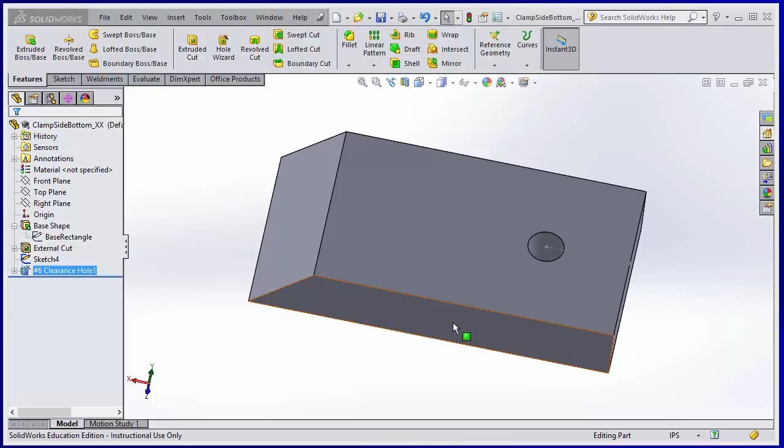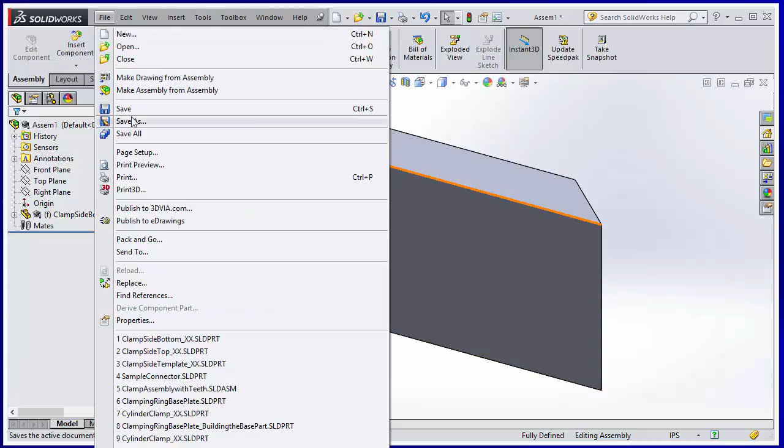From the File menu, go to Make Assembly from Part, and it'll open into the new assembly. There won't be anything on the screen yet until we add all the components. Once we insert the bottom part into our assembly, we can go to Save As, and we'll save this as Clamp Assembly with space for your initials.

Now we'll add the other component, the top side. We'll go to Insert Components. As you saw when you started up, clamp side bottom's already inserted, but we need to insert the top as well. So we'll go to Browse. In your student folder, you should find clamp side top.

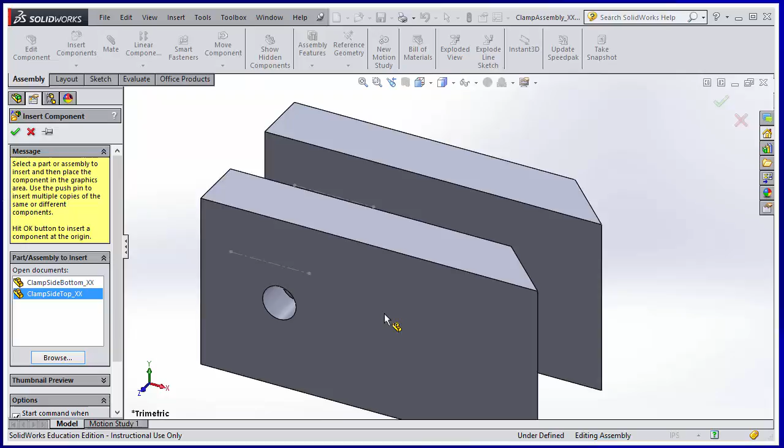Clamp side top will appear, and you will have to set how these two parts mate together because the computer doesn't assume any orientation. We'll go ahead and tell it to set it by single clicking the clamp side top. Now the next thing we want to do is position these two where they're facing each other so that the two larger sides of the clamps face each other.

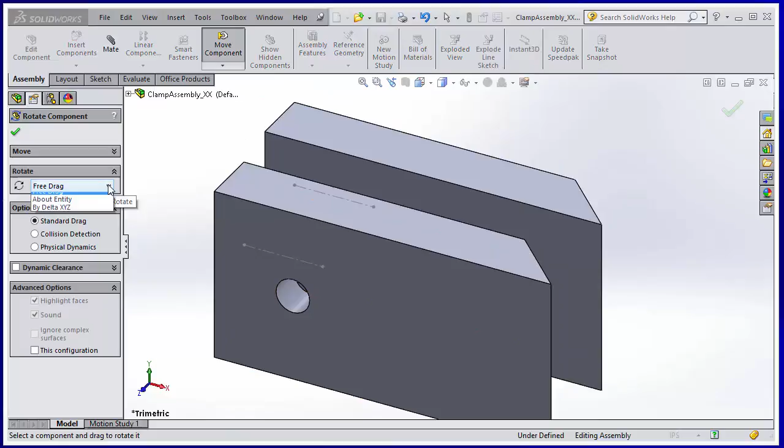So we'll click Move Component, and we'll go to Rotate Component. In the Rotate section, we'll change this rotation setting from free drag to by delta XYZ. This allows us to actually specify degrees we want it to rotate. Basically, we want to flip this over so that the two larger sides are facing each other. So we'll flip this on the x-axis, which we can see here, by 180.

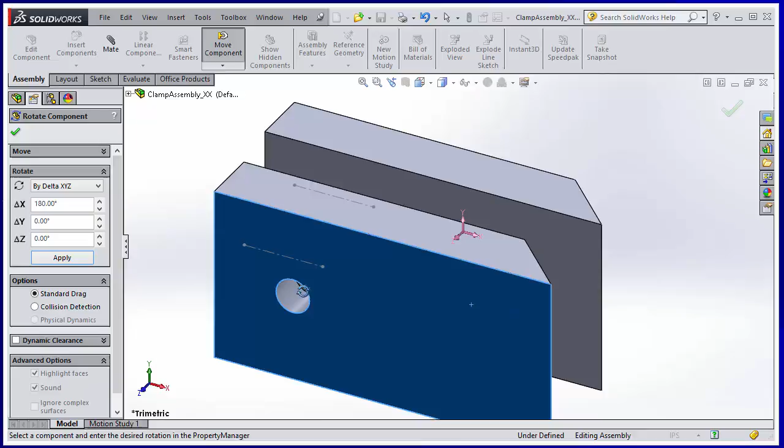So we'll select the top here, and you'll notice it rotates, but the two backs are facing each other, or the two smaller sides are facing each other. So we'll want to move again to position these two. They're oriented the right way, but they need to be positioned correctly. So to do this, we'll go to the Move portion, and I'll go to Free Drag, which allows us just to freely move these.

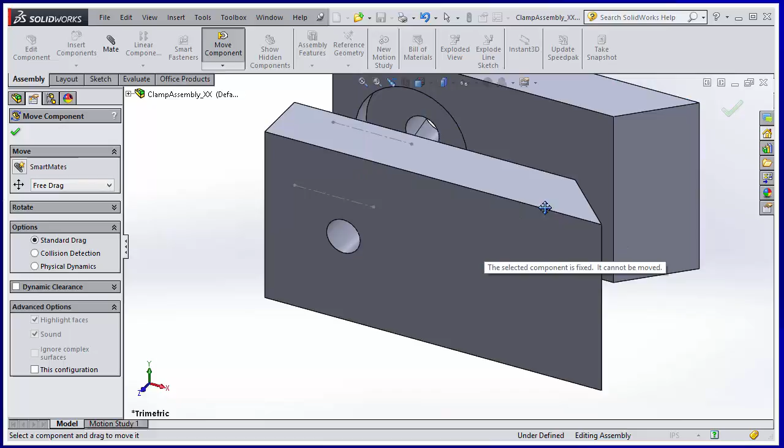Once we're selected, we should just be able to move it, and then you'll see these two. Zoom out just a little bit so you can see, but these two are positioned alongside each other. So now we need to mate these two. We'll accept the move settings by clicking the green check, and then we'll go to Mate.

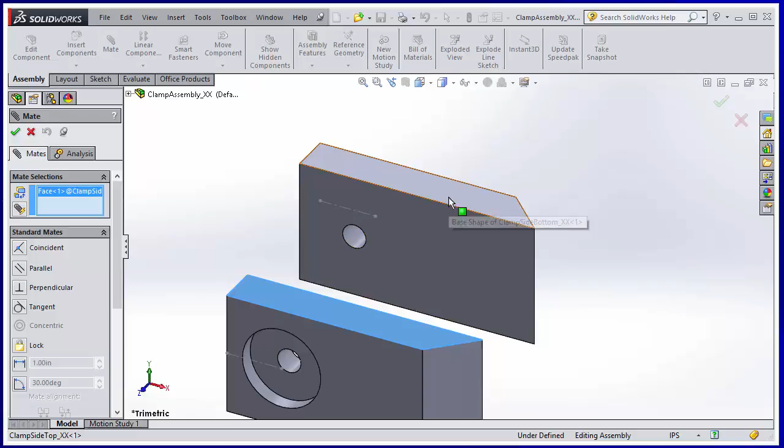Now, the mate settings are set up geometrically so that we will select faces, sides, or points and describe the geometric relationship between those two. So we'll select this face here, and then we'll select the similar face on the opposite part. It'll make these coincident. Click the green check to add the mate.

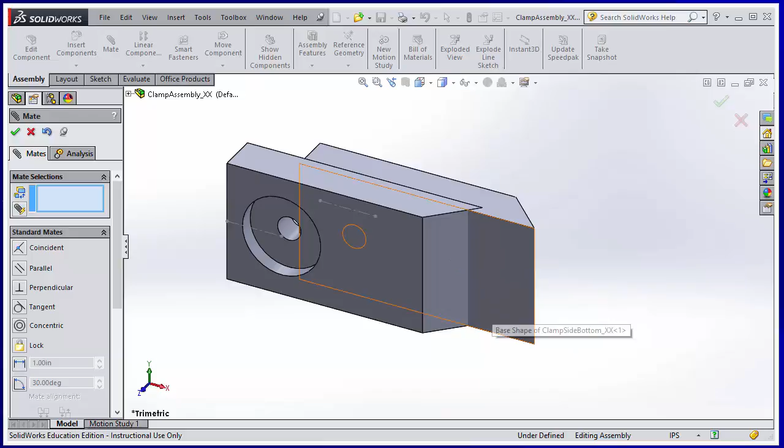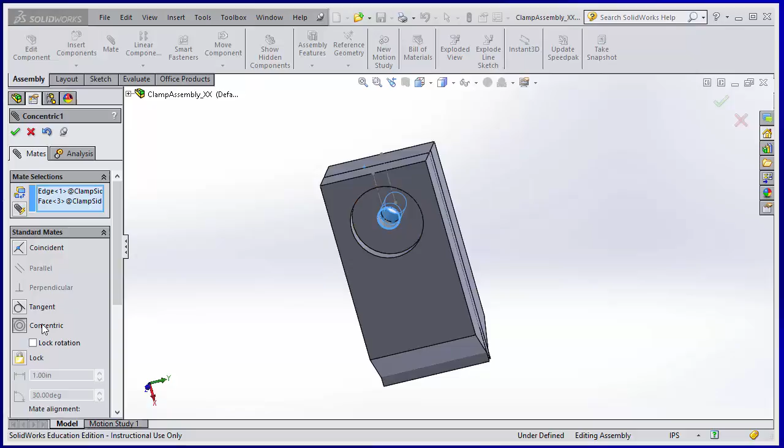But you notice all that it did at this point is just make sure that these two faces kind of occupy the same space. We need to add some more mates to properly orient it. So the next mates, we will select - you can freely navigate around slightly - we'll select this hole, and then we'll select this face here, and we'll make those concentric. So now it's even further positioned. We see there's still some overlap here, but this hole is lined up, and these two faces are positioned approximately.

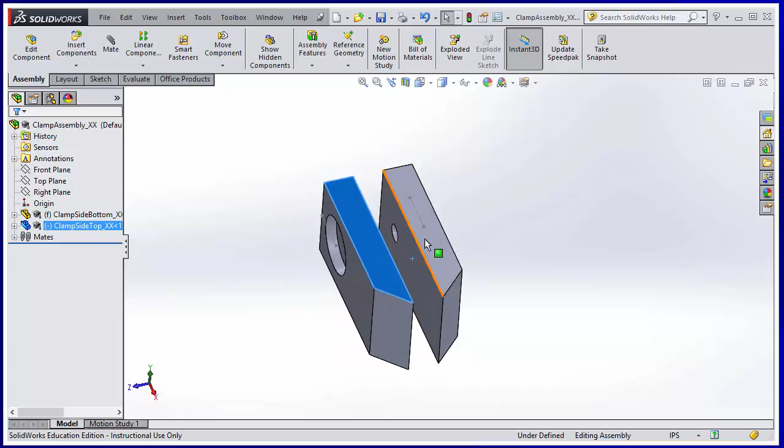After I click the green check, the mates are added, and notice you can move this part, but it's restricted so that both of these faces remain parallel, and that this hole, either the edge and the face or the two edges, are both concentric, so that it can only move towards each other in this exact orientation, which is how we want the clamp to operate. The first part that you added is going to be attached to the origin, but this part will be able to move, and we'll specify more settings to put these in place once we add fasteners.

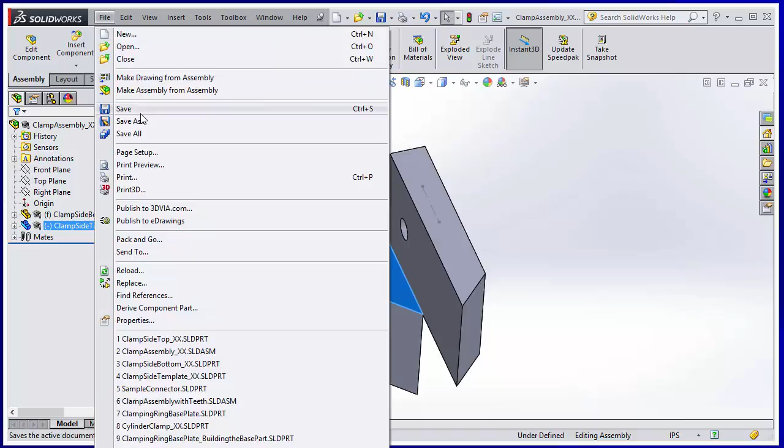Save your project, and we'll look at adding fasteners. It'll ask me if I would like to rebuild the document, and you can accept that.